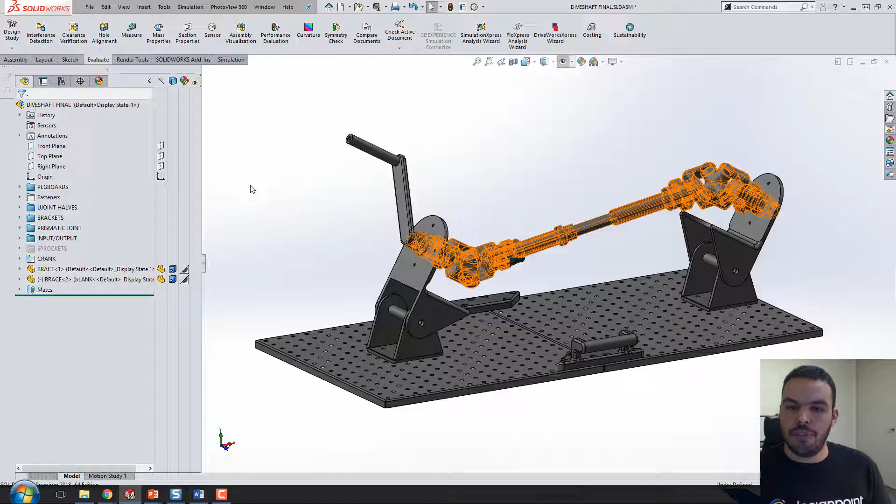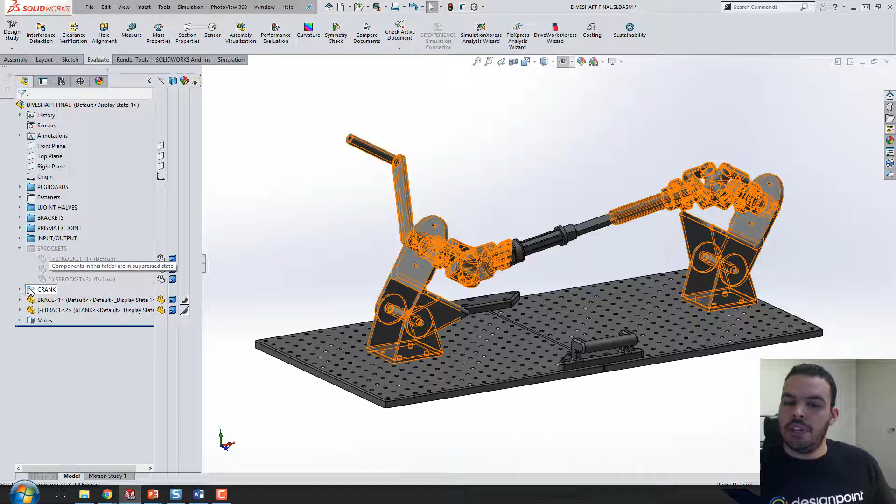So it could be clear for hidden. It'll just be regular blue for when everything's showing. And it will show combinations of things. So this folder just has all suppressed components, so you have a gray one. But this one has all 3. So just at a glance, we're able to see what kind of file each folder contains, and we can work it appropriately.

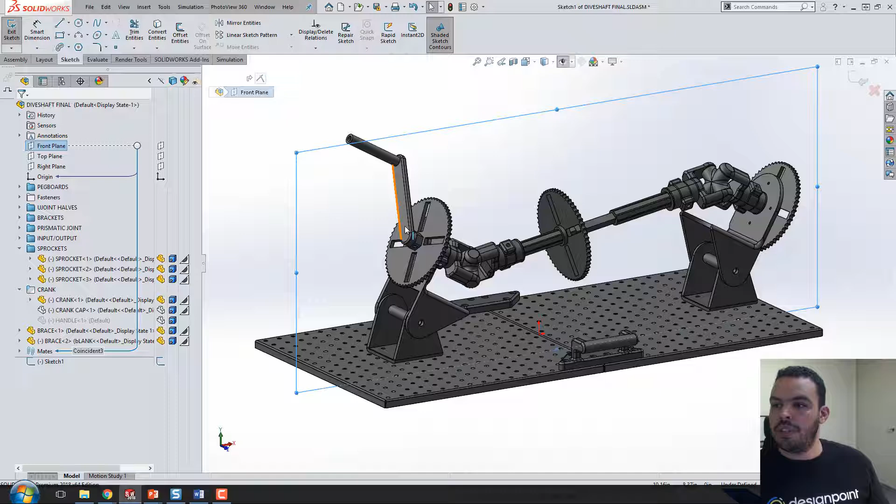And just like that, I have all my sprockets back. Pretty cool. I'll go on to the next one. So let's go check out those dozen mouse gestures. So if I right click and I drag, I will get this wheel, and we can see it actually has been updated. So now I have up to 12 items in your mouse wheel. This is very powerful, as you can see. More options, more fun, more speed. Going to the next thing.

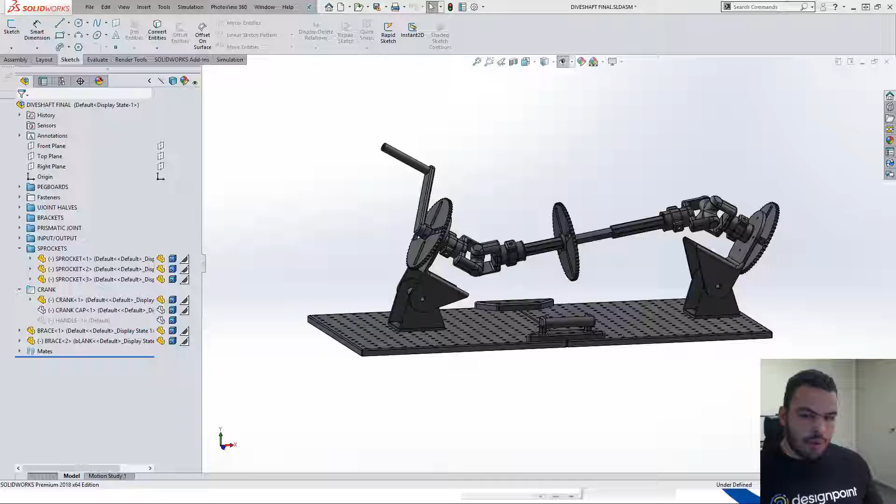Going to the next thing, I'll show you how we can hide faces when mating in an assembly. So going back to SOLIDWORKS again, I'm just going to control drag just to get another one of these guys. And I'm just going to go into our mate command. And I want to put this down on this pegboard here, so I'll select the face of the pegboard. But in the old days, I would have to turn it around to see the other side. Not anymore.

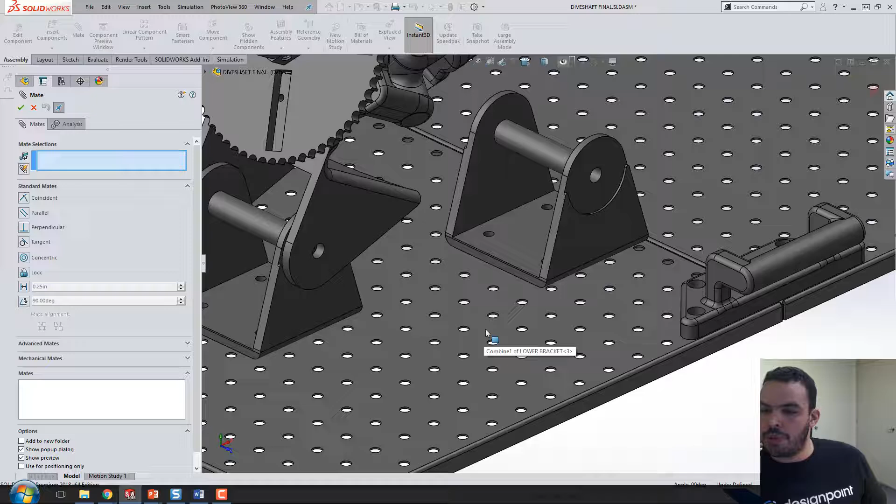So, new in SOLIDWORKS 2018, I can select this face. If I hit Alt, it'll actually hide that top face. So now I'm looking at the bottom, and you can see these are the holes as seen from the inside. So I can go Shift Alt to unhide them, and I'll show you again. So looking really closely, look at the holes. Hit Alt, that face is hidden.

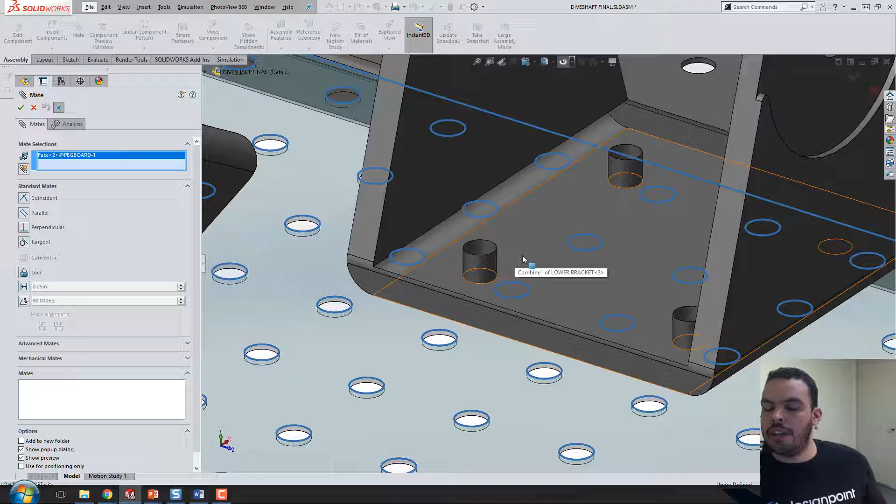And selecting the bottom face from the top is the same as selecting it from the bottom. So I can just click that, and it'll place it down for me. I don't have to waste time moving the display like that just so we can select those. It'll make assembly modeling much faster.

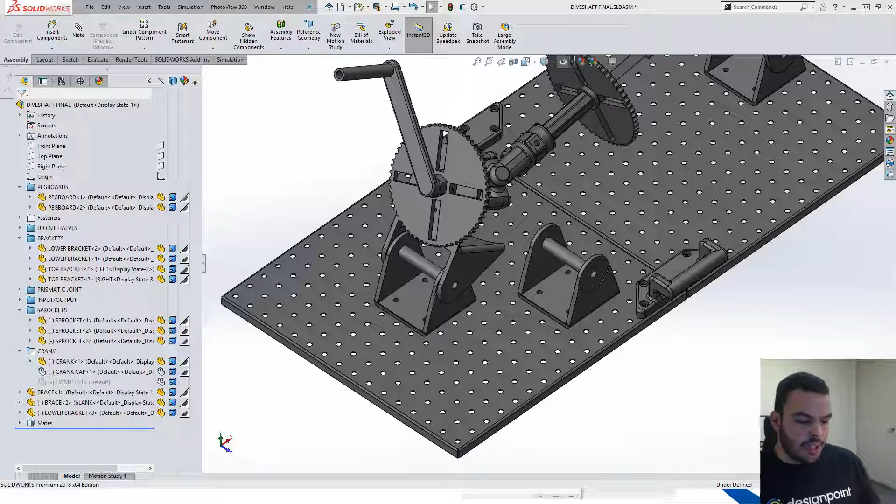Going back into here, I think the measure tool got a pretty cool enhancement that seems to be overlooked. So going to our Evaluate, getting our measure tool popped up over here. So here's our measure tool. I can, just as always, get a length. But it's pretty cool that if I hover over this, I will get a little copy display. If I hit that, yep, it copied to my clipboard.

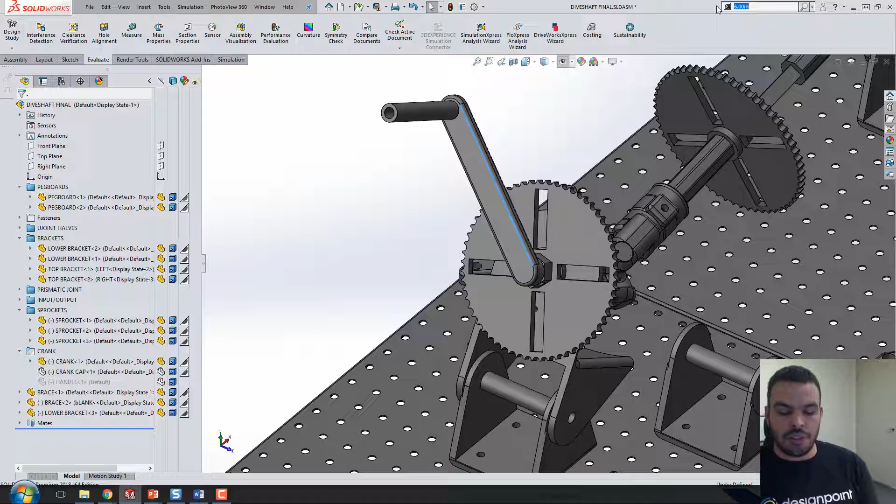So I know this is not a very logical place to put it, but if I booted up a new feature and I needed to use that relevant dimension, I can just paste it right in, right from the copy tool. Very cool stuff indeed.

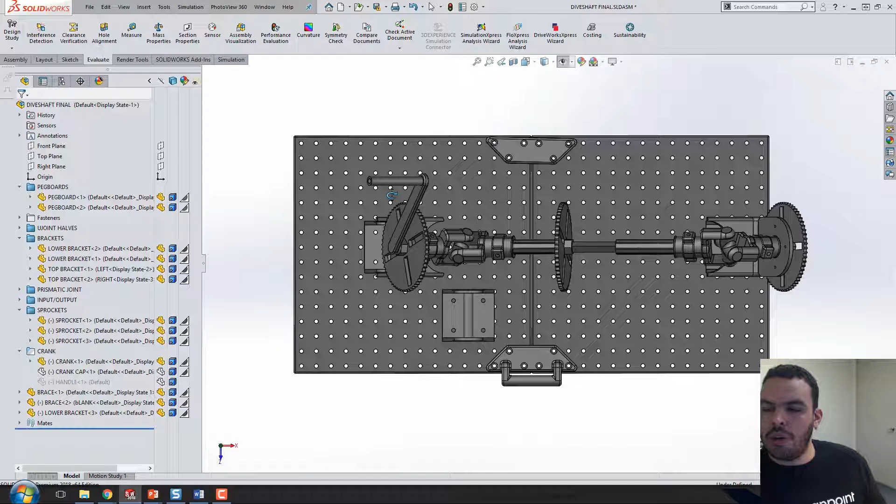And lastly, I'll show you how we can press T to select over geometry. And what I mean by that is, let's go back here. If I wanted to try and select all these components from the top, but not get the pegboard, it was kind of difficult. I can't do it from here, so I have to kind of negotiate with what I have with the model. Maybe something like that. And if I wanted to include these ones, you see this guy kind of gets in the way.

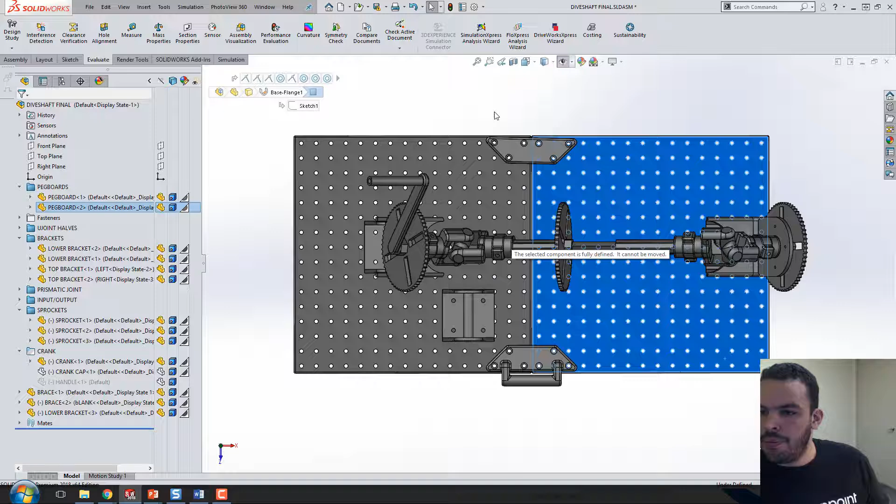So what I can do is press the T key on my keyboard, and I can just select over geometry like that. I'll do it one more time. Press T. And you can see, instead of selecting the face, it just brings me straight to my highlighting. Very cool. So I don't have to orient the model in some strange way and get all that geometry. It's just one keyboard key away.

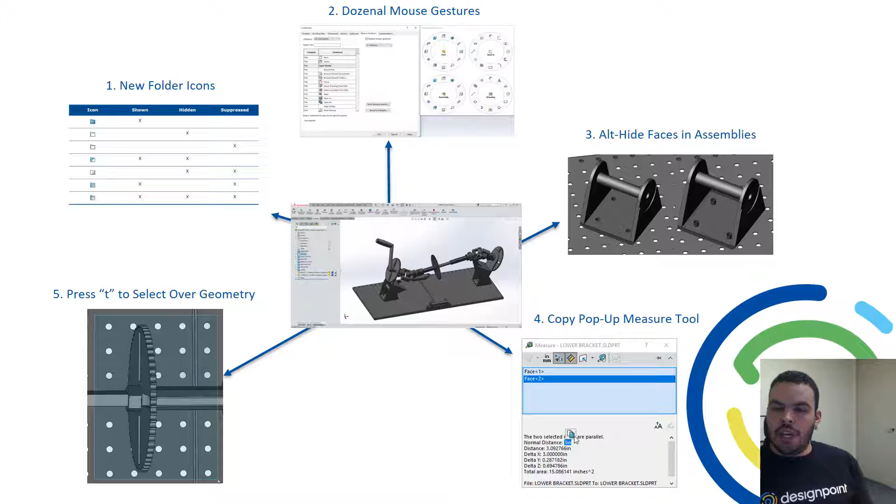And with that, I hope you liked this look into some of the speed related features in SOLIDWORKS 2018.